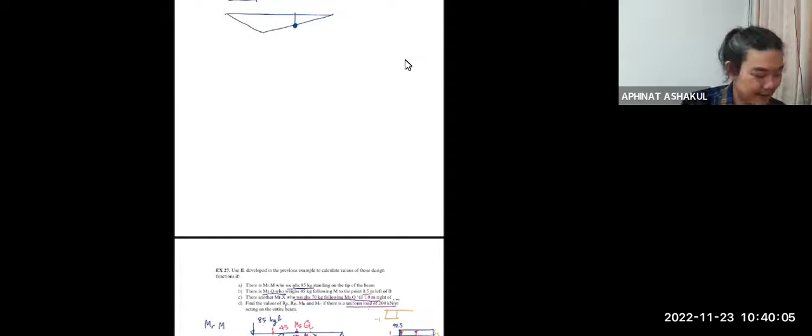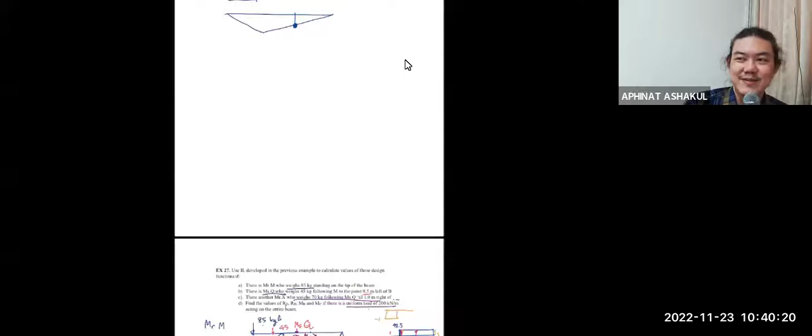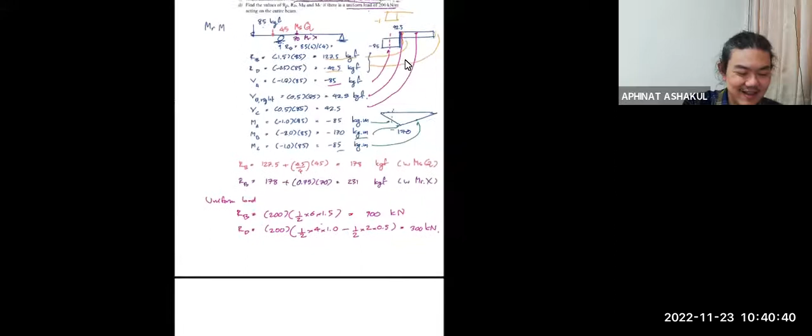You know what, I'm really glad about something like my accent, because I kind of mix the British accent with my pronunciation, just to make it a little bit more classy. I can also speak a few more accents if you want, just for the sake of not getting bored. But you would end up laughing, so that's why I don't do much of the accent change anymore.

Yesterday my daughter called me, and I picked up the phone and used a very strange voice talking to her: 'Hey, what are you? What do you want?' Like that. It just so happens her friends were nearby, and I don't know how they could all hear our conversation. She must have turned on the speaker. They laughed, 'Hey, your dad is cool.' I don't know how cool is that. Just change your voice. Anyway, okay, we're gonna try to do this.

So this is a new problem. Let's try to write it down. Okay, this is your beam, looks like this. And I give you a roller.

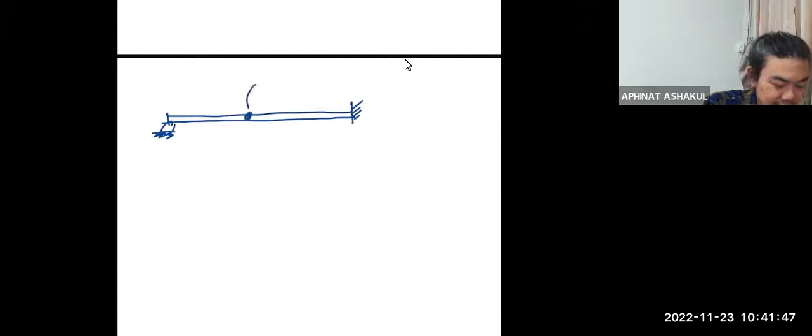This becomes the indeterminate structure, right? But I give you the internal hinge, so when you have the internal hinge, it means that generally this structure becomes a determinate one, correct? Because now you have an extra equation, knowing that this point has moment equal to zero.

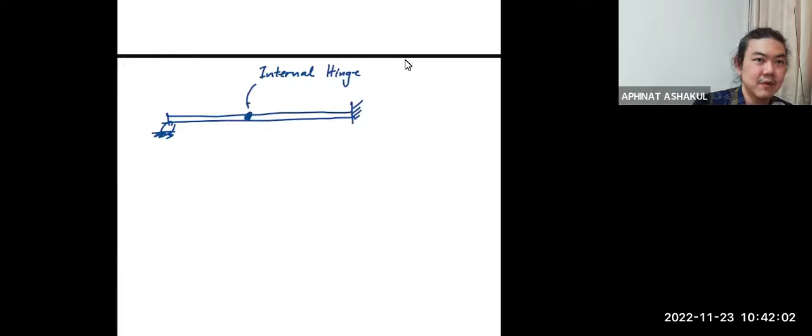And so I give the length 6 meters here, and we have a point of interest here at the distance 6 meters, calling that point C.

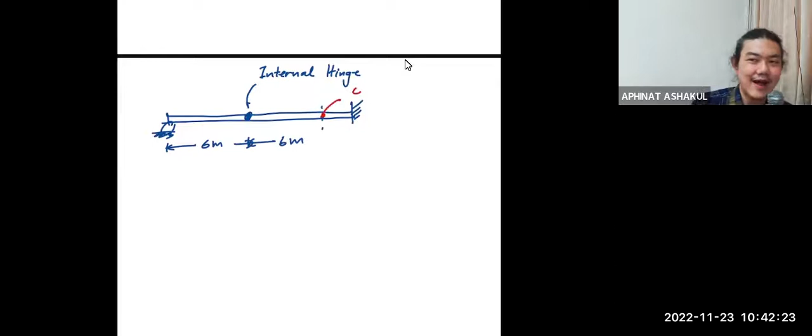So this accent, okay? Maybe still okay? Oh, but maybe we could try some accent, like Texas, like that. But I don't like that. Anyway, so let's go on, and this is 4 meters. Okay, it's a little bit too short, not drawn on scale, my apologies.

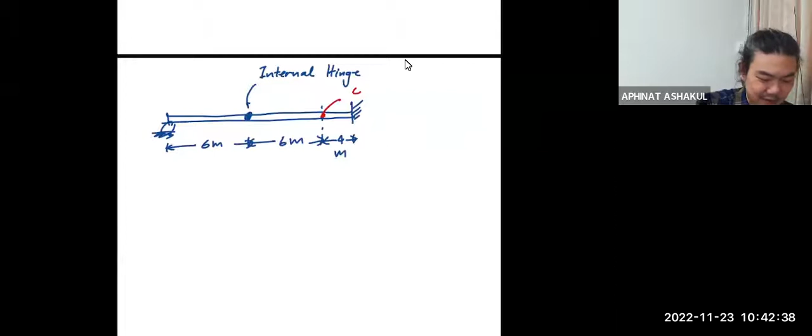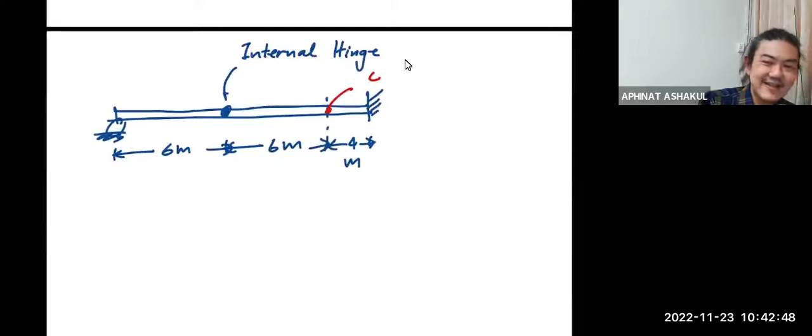Small, okay let's enlarge. And again, we call this point A, point B, and this should be D. We're going to try to draw the influence line for the following design functions. The first one is RA.

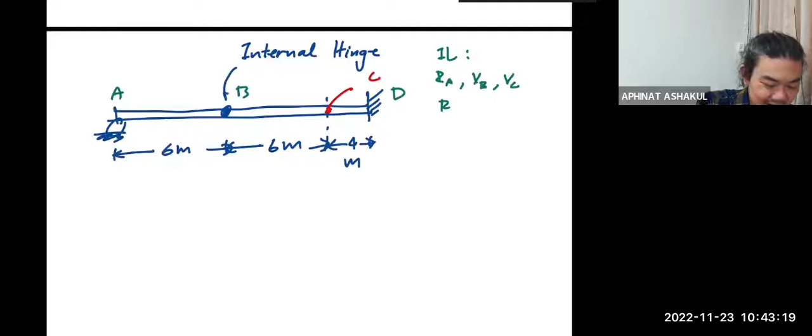Okay, right, small mistake, thank you. RA, the second one is VB, and then VC, RD, and MD. See what happens.

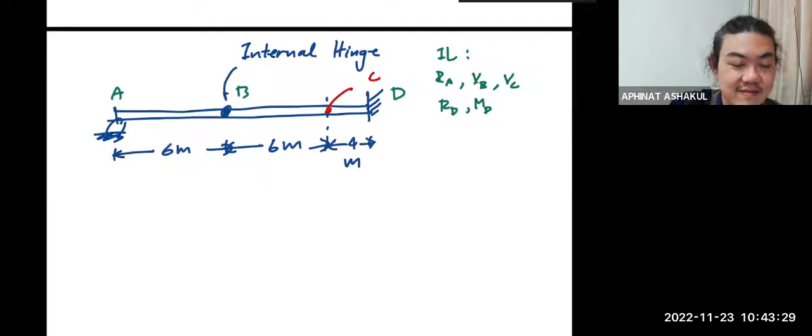You speak through the mask and I'm far away, I can't understand. No, it's not... are you trying to kill me with shock?

That is a very scary thing, let me tell you a story. Long time ago when I was doing my master's, there used to be a live session like this, and the professor was teaching to another campus. By the end of the session, the equipment guy said, 'Professor, I'm sorry, we could not do the live to another campus, so you have to do it again from the beginning.' Then he said, 'April Fool's.' You know what that is? April Fool's Day, you're supposed to tell a lie. The professor was shocked because he'd have to teach again for 3 hours. He said, 'Oh, good one.' So you were doing that on me.

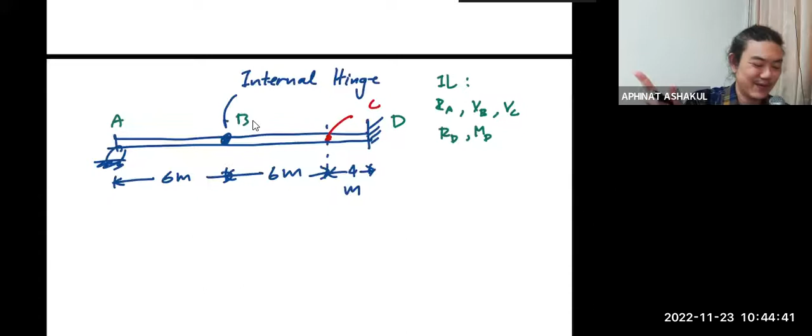Anyway, I'll give you guys a few minutes to finish this, okay? This would be interesting because now we have a little bit more complex structure. What always happens is you guys forget that you can apply the unit load anywhere to solve this. Let me go quickly, otherwise I'm afraid I may not be able to finish.

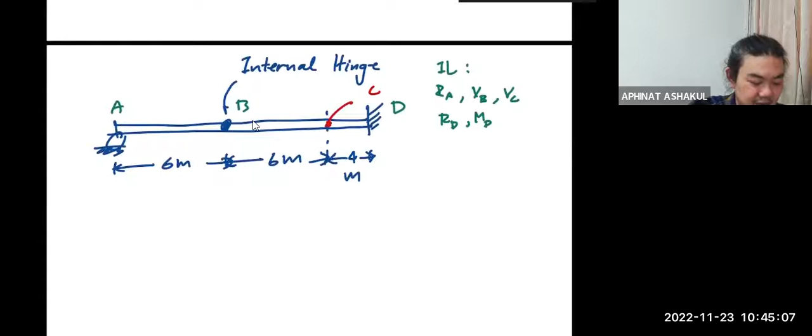So now for RA first, you know what's gonna happen. We let RA go free, right? But we have a hinge, so what do you think is gonna happen? RA will just go up, but this is a hinge, so it will go up like that. But when you try to push the portion BD up, that is a perfect cantilever beam. So when RA is free to move up, RA cannot move the BD portion, and therefore this becomes the influence line of RA.

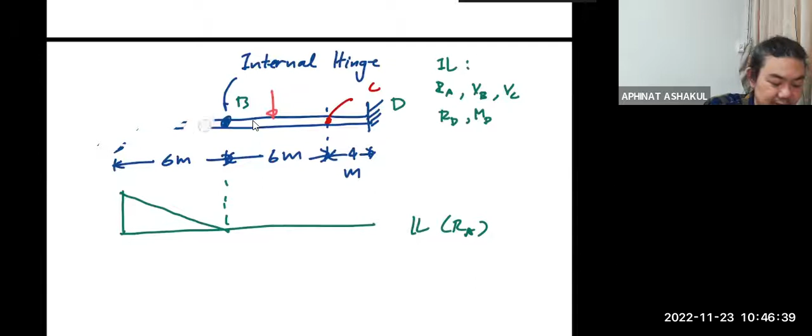When you look at the structure, you see that when your unit load reaches B and moves beyond point B, like this, when the load is between A and B, some reaction will be on A, right? But when the unit load moves beyond point B to between B and D, this is a cantilever beam, and you can forget about the fact that you have it. It becomes a typical cantilever beam, so it makes sense to have the influence line that looks like that.

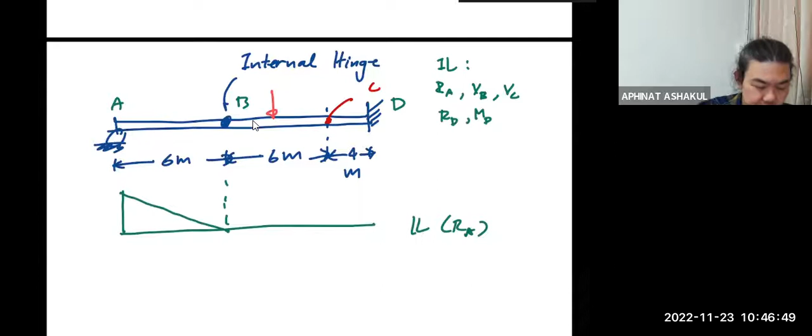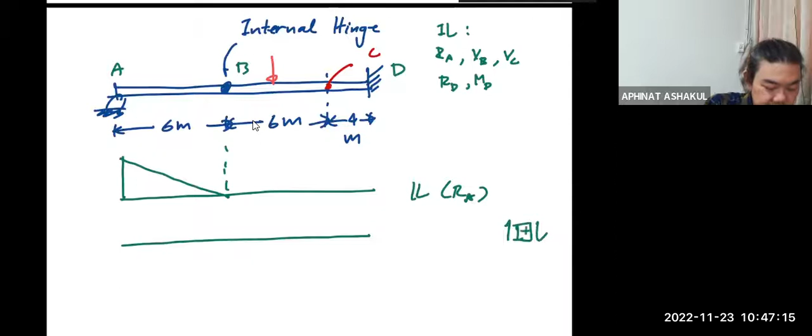Wow, you know, generally I would lock the door. If we have a typical on-site class, you're gonna have to wait for the next session to get in. Barging in late will destroy my concentration and your friends as well. But this is the last class, right? Can't do anything.

So this is the shear. When you think about how the load will affect your function, let's say okay, you guys are taking notes, I'm going too fast maybe. I decided to add the content, and now I'm a little bit afraid I may not finish the whole thing, so I'm going fast a little bit.

So okay, now guys are catching up, right? When the unit load is moving towards B, the shear at B should increase, because the section at B is under greater load when the load moves closer. In terms of shear, it should keep increasing until it passes point B. Again, there is nothing that is going to tear point B apart, so as soon as your unit load moves beyond this, the shear becomes zero.

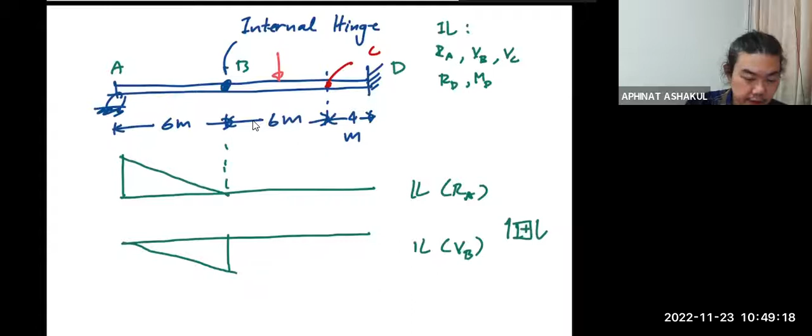It's my wish that you would see the behavior of the structure rather than trying to use the Muller-Breslau method and fail. Once you see how the method helps you, you should be able to relate what you have here with the actual behavior of the structure as well. Okay, and VC now. Oh, interesting.

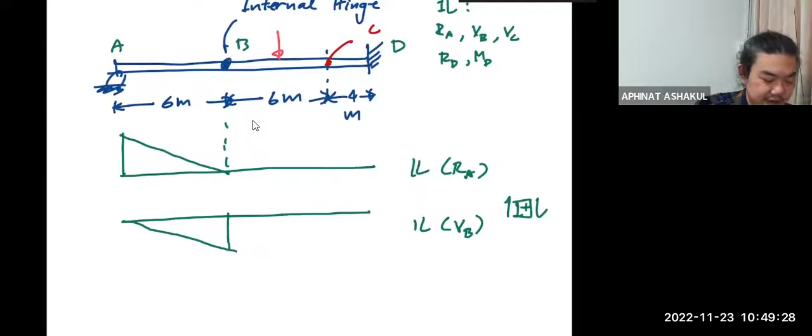Now VC is beyond here. So let me try to draw. So point C is now here, okay?

So when I want to free point C, on the right should go down, on the left should go up. So what's going to happen to the left side here? What's going to happen to this side? Remember, you have a hinge. So when it's going to go down, what does your imagination tell you? How is it going to move?

You have two hinges now at A and B, correct? So things should fall, like a typical hinge. Think about the door. So this guy should come down again. But here, you don't have anything anymore. It's just a solid structure with the freedom to move with the shear on the right. So this should look like this.

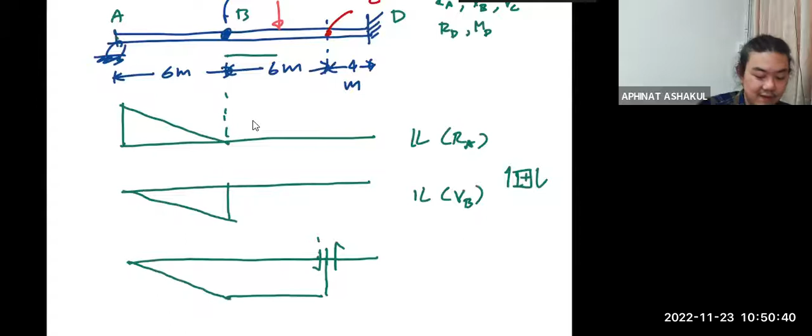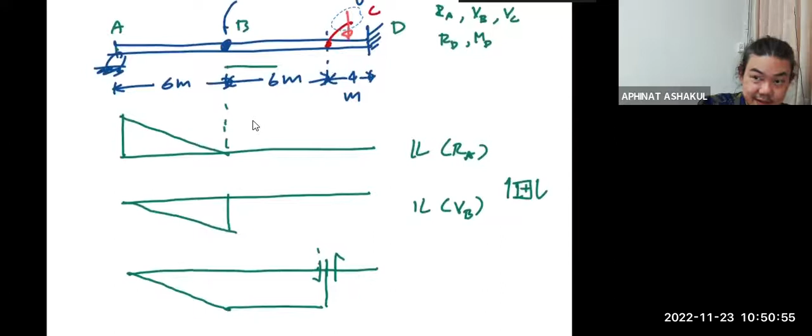Now, again, when the load reaches the right side, you have another cantilever. And there is nothing on the left side of your C, of your section C at all. So when the load passes point C, again, we should have zero shear. Because now you focus here and you see you have a perfect cantilever beam, when the load moves past point C. So the left side doesn't matter anymore. The shear becomes zero, and as a result, this becomes the influence line of the shear force at C.

And think about it. When you have this, you should always try. I think you guys are not looking very happy, so I'll slow down. It's time for you to use your imagination and talk to the structure a little bit more, right?

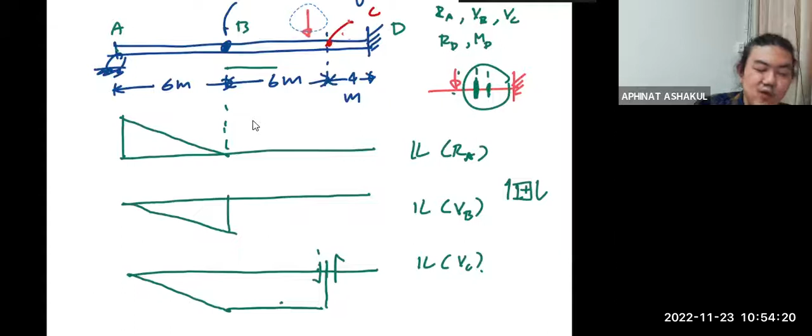Once this load passes point B, again, and moving towards point C itself, so you have a constant shear, right? Think about your shear force diagram of this structure. And again, once this load moves past point C itself, it becomes a cantilever beam. That's why we have a zero shear at C.

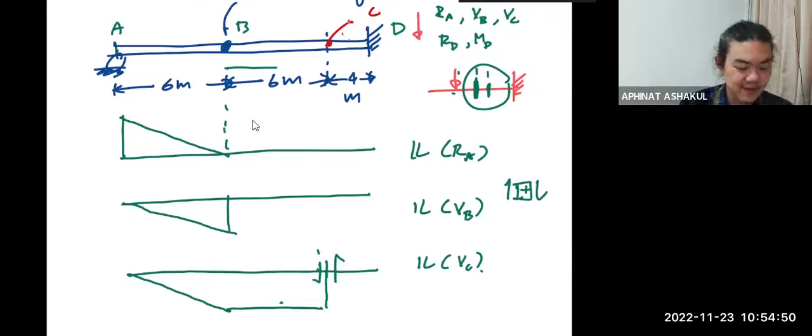It makes sense, right? This is how we use Muller-Breslau to the extreme, and you're going to have a lot more fun with the examples. But I think I have a few. Okay, and now RD, right? What's going to happen to RD?

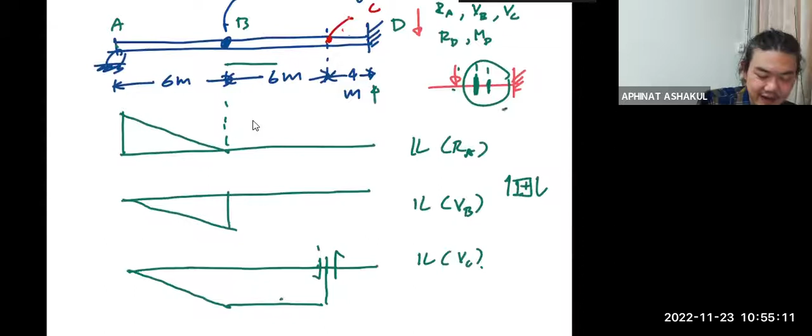When you want to move RD freely, RD is here, right? Think about it, because in a similar way to how I talked about the shear here. Once the load gets beyond point B, RD will become a constant, right? Can you see that? When the load moves past point B, your RD becomes a constant.

Because you now have a structure that looks like this, so your reaction is always equal to that. It doesn't hurt to go back and try to understand the structure rather than applying Muller-Breslau blindly.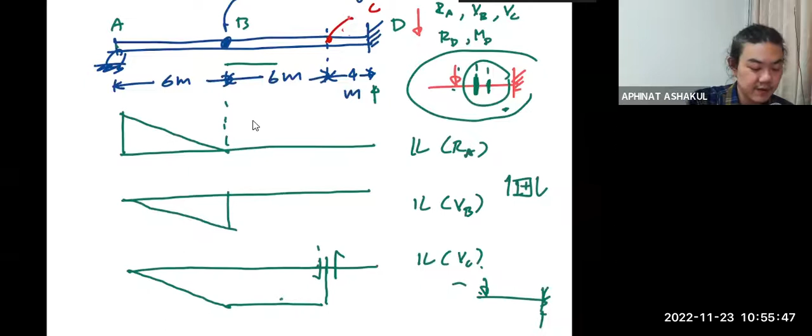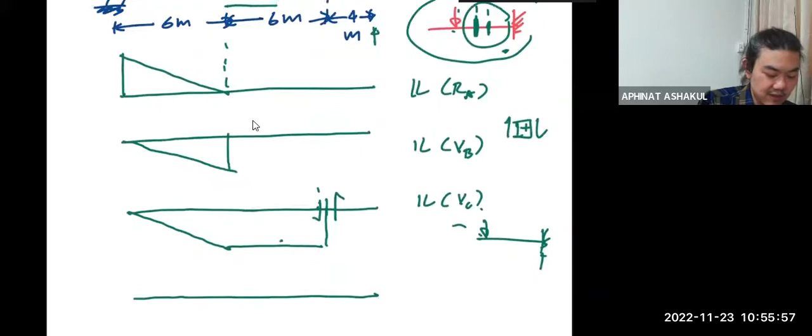So now, coupled with a little bit of knowledge, I can see that RA is going to be zero when your load sits on here, right? Likewise, when I try to move this, what happens is that because we have a hinge here, portion AB will move up, and then the rest will become constant.

So this is the influence line of RD. See? Because once the load moves past point B, you have a constant reaction, which is represented by this portion.

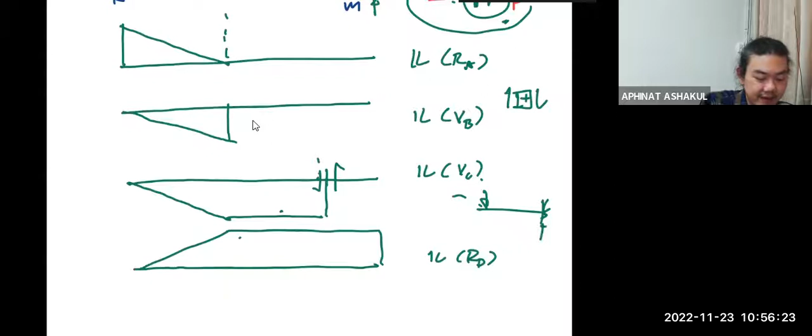In fairness to me, this is maybe one of the very first years I write a lot, because generally I don't write that much. I will speak, and it's your duty to take notes. But this year I decided to write more, so that those of you who don't have very good listening ability have a chance to see things. And now I have a complaint about my handwriting. Yeah, you win some, you lose some.

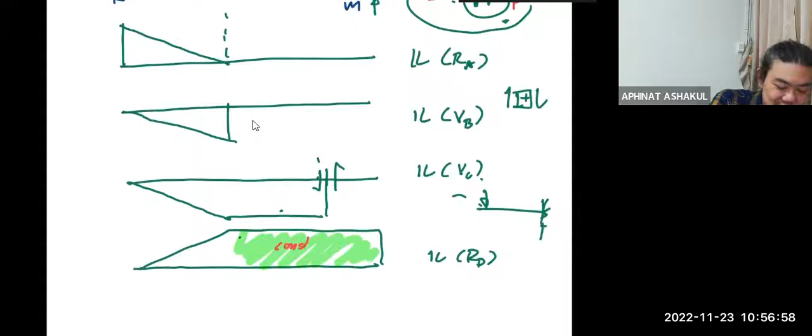So this is the region of constant RD, right? Not B. This is D. There's a dot, right?

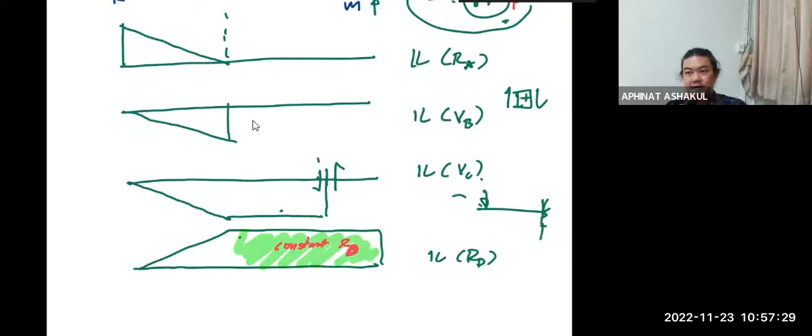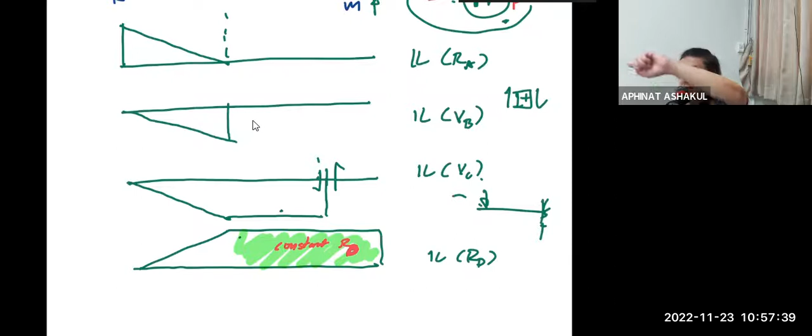And now, boom. Okay, please stop me anytime you have a question. Don't let it go by, okay? Just ask immediately before you forget. Hey, you guys need more light at the back, come and turn it on, okay?

Okay, what about moment now? The moment is going to happen when we let this guy go free like that, right?

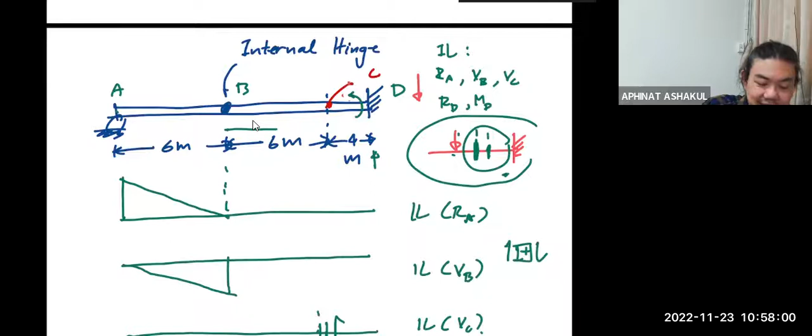Now we have a hinge at D so that this could move. We have a hinge at B, we have a hinge at A, so everything will fall, right? Because we have 3 hinges, so you can imagine that it will go like this.

Now, let's see if it makes sense. But you guys are writing first, right?

I thought about that day a lot when I got COVID, because the week before I went down with COVID, we got a lot more students in the room, more than this. That was the day with the most attendance. Everybody came in here, and then I got COVID. So I taught from home for a week, and the week after that I came, it was like the entire class disappeared. So sometimes, you know, this is on record, I can tell you the story about the collapse of the building.

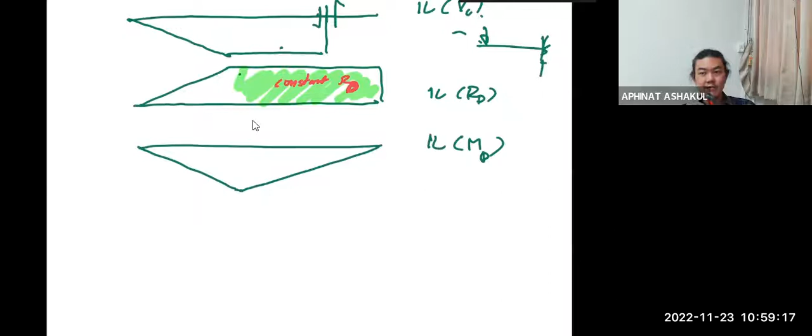My teacher, one of my very beloved teachers, said if you have something collapse, you need to have 3 bad things happen. First, bad design. Second, bad construction. Third, bad luck. So it takes a lot for one building to fall down. That hotel that Ajahn Bharat mentioned yesterday was in Korat province. It collapsed when I was a 4th year student, and I did not go.

The department organized a tour to the site. I didn't go because first of all, I can say I don't want to. Second, I had things to take care of because I was the vice president of the engineering exhibition. So my friends came back and said they smelled rotten water all over the place. More than 100 people died. You know what happened to the building? There was a cafe underground for lunch, and there was one troublesome column blocking the view of a singer. Audience couldn't see a beautiful singer, so they wanted it removed.

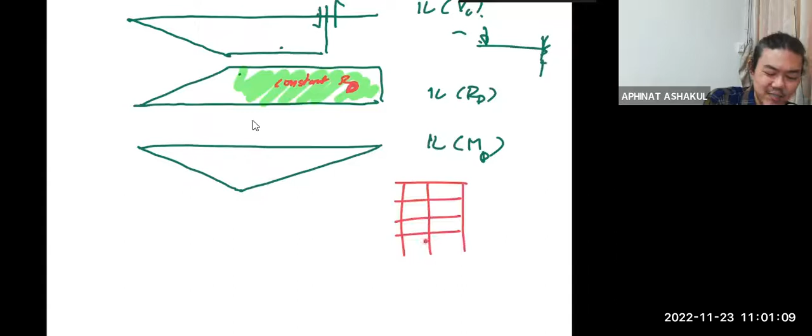Then when you remove the column, what generally happens? If you have a building like this, with columns coming down, and you have a lot of floors like this, say this guy is blocking a singer, so okay, we're going to remove it, right? Fine, no problem, you can do it. But you need to make this beam very strong, it's a transfer beam. It has to be able to transfer the load of this entire column across this distance.

The first thing was a bad design, because the guy who designed the connection between the beam and the column probably didn't do it properly. He wasn't a real engineer, he was like a foreman turned engineer. Second, I bet the construction didn't go very well either.

On the day the accident occurred, we generally store water on top of the building. Do you know why? Because of the head, so that water can flow down easily - you pump it up, then use gravity when you use it. On that particular day, the water tank was full.

Not only that, there was a small conference with hundreds of people in the conference room, so the live load was full. They said there was a sign that these columns were about to collapse, because cracking occurred before, but nobody paid attention. When the collapse occurred, the concrete just burst out of the column - in a concrete column you have reinforcement like this, right? No concrete was left in the stirrup area at all. It was complete failure of the concrete.

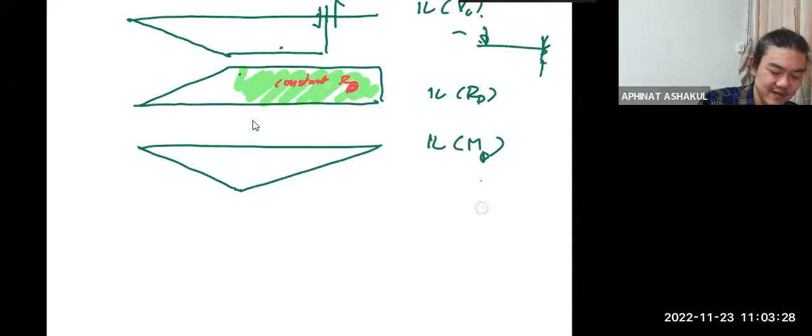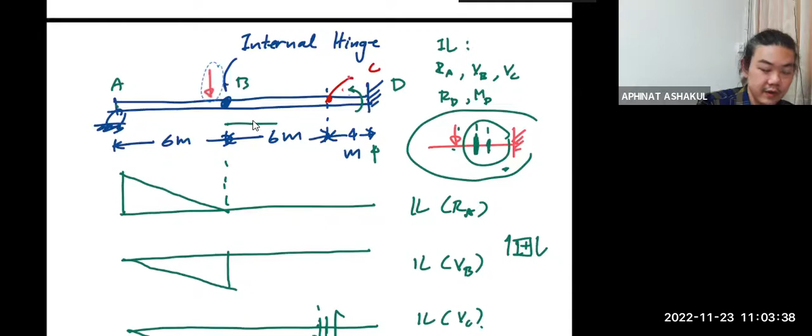Okay, so here think about the moment - let's go back to the load again. If you look at the shear, when the load is here and moves toward B, the shear at B keeps increasing, and the shear at B applies to the portion BD. So as the magnitude of the load keeps increasing, the moment at D should keep increasing, and it will be maximum when the load itself reaches B.

From this point onward, the shear on BD will remain constant because the load is now on BD. However, this time the moment will keep reducing because the moment arm keeps reducing as the load moves towards the support itself, until it reaches the support and the moment arm becomes zero.

So that is why we have the bending moment diagram - the influence line of the moment at D. It increases at first until the load reaches B, then it reduces because now your load becomes constant, but it moves toward the support, so the moment arm keeps reducing. So it makes sense, and now the next question is: how much?

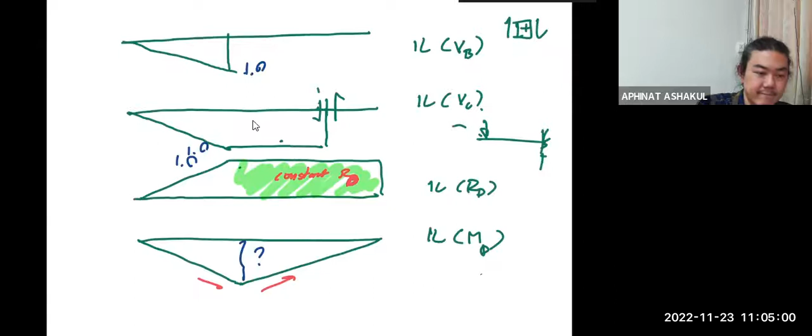This is one, right? No need to discuss one. This time you use too much of your intelligence to understand this. It's a good thing because you're seeing this for the first time, so it can tire you out because you think a lot - it's only natural.

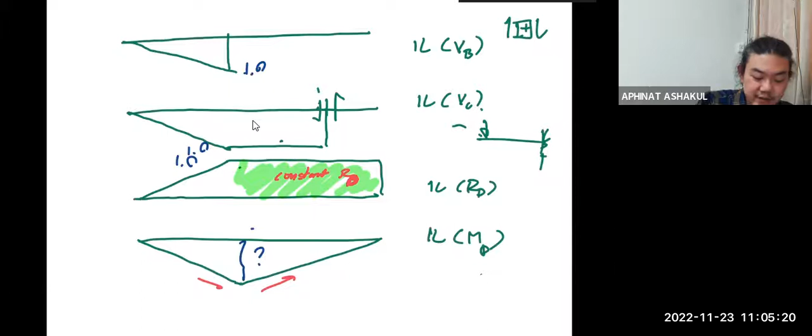Now this value comes from the fact that you load the unit load at B, right? Because this is where the maximum moment occurs. And what's this distance? I think it's 10, right? So what's the moment? Oh, it's 10 - so this is 10, not 1, okay?

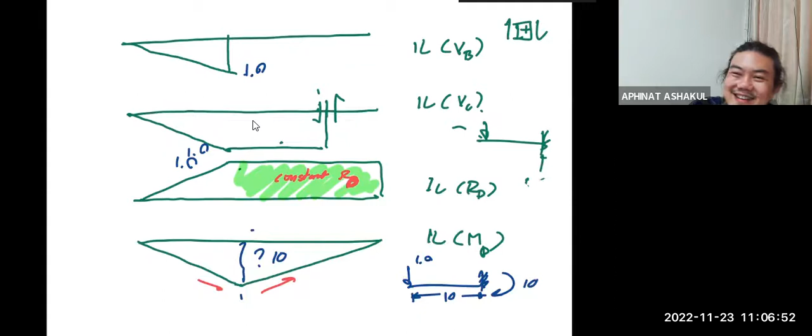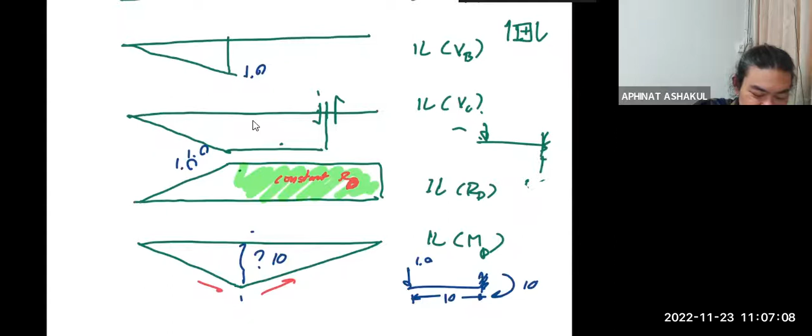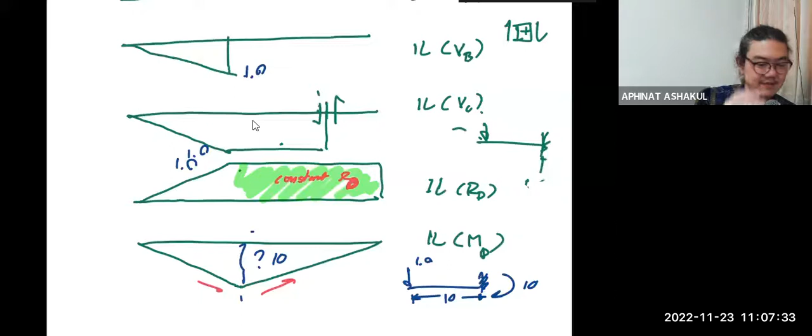Do you have any questions on this? No? So hopefully it's crystal clear. Is it? Oh yeah, right. I shouldn't expect anything less, right? You guys are the most brilliant in the world, so I think it should be crystal clear to you. Okay, I put my glasses on for no reason, like a prop.

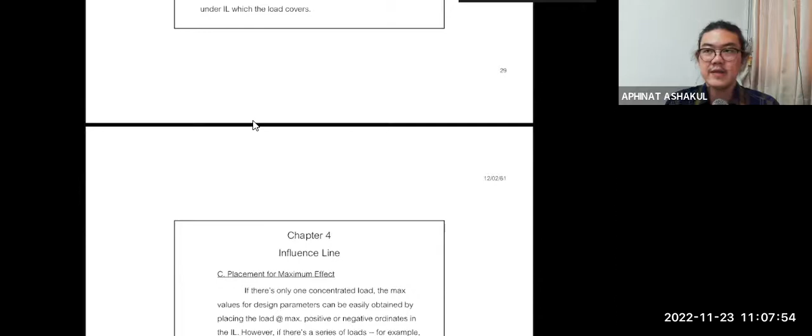Because I need to go back here a little bit to demonstrate the use of the influence line. Remember last time we talked about the fact that you can multiply the influence line with the magnitude of the point load, or multiply the magnitude of the uniform load with the area of the influence line that we cover. That's the first function - seems like a bit British today, right?

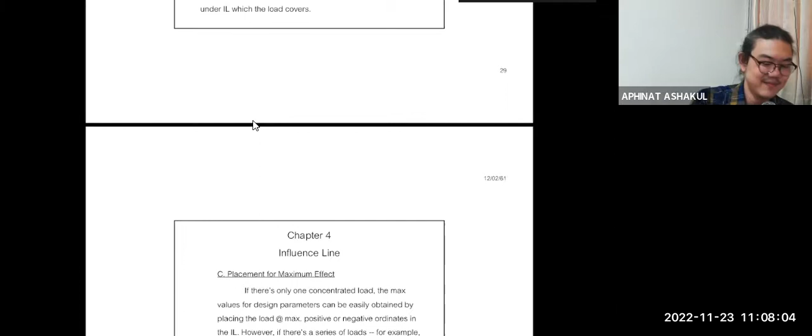Anyway, now we are going to focus on another thing called the placement for maximum effect. This is actually the real use of the influence line. First of all, we need to be able to figure out the fact that when the load moves around, what is going to be the most critical position that gives us the most critical value of the design function.

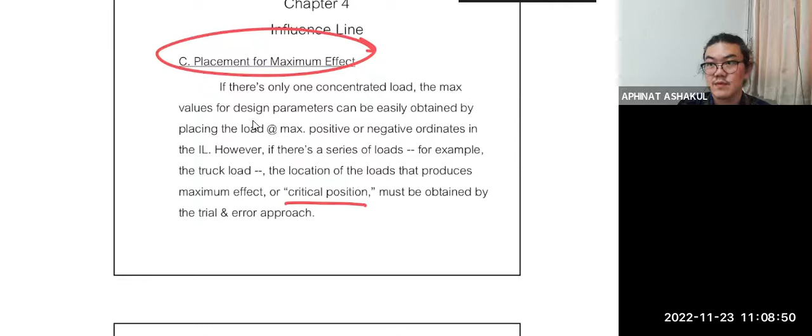Now we're going to start by looking at the first thing. Generally, let's say if I want to know - we have moving loads coming in, a lot of them moving towards the beam like that.

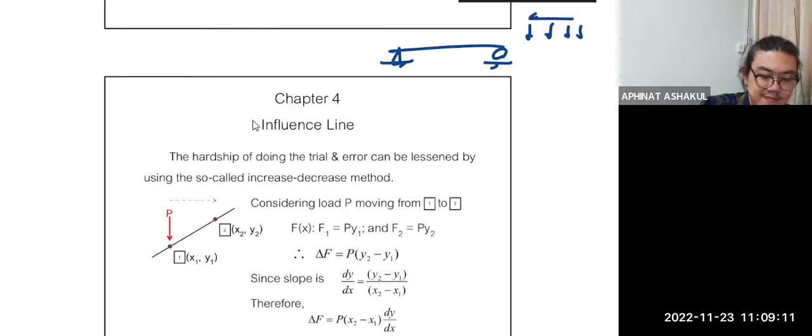When the load moves toward the beam, I want to know the shear at C. What kind of loading position will give the largest magnitude of shear at C?

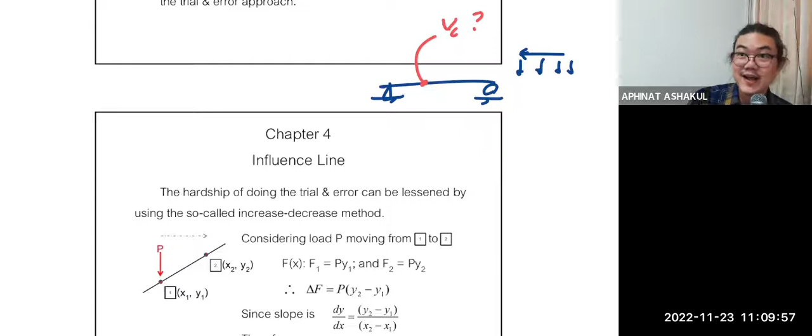If you don't know anything, you'd say we're just going to have to keep trying every position, right? Let's say we have 200 loads. We'd put load number 1 on C, load number 2 on C, 3, 4, 5, until we reach 200. But that would be the Stone Age, right? Even though we have computers now, we still have a better method.

So the first one we call the increase decrease method.

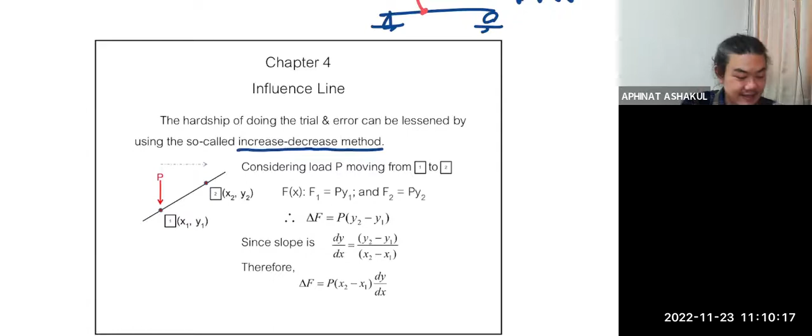Let's say now, I'd love to see the load moving from right to left, but now it's moving from left to right. Let's say I have a load P here. You can see it moves to the right, goes up the slope of the influence line. At position 1 we have coordinate x1, y1, and at point 2 we have x2, y2. The x would be the distance or location on your beam, and the y would be the height of your influence line.

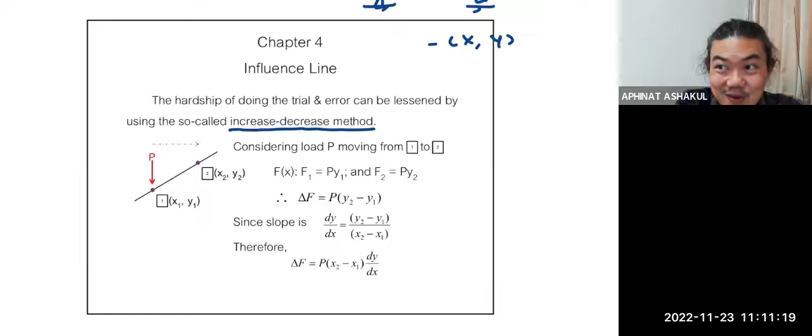When we talk about the coordinate system xy, do you know its name? Do you know the official name of the coordinate system xy? Want to try your luck? Look at your friend. Do you know what it's called, the XY coordinate system?

It is called Cartesian system. Right? It tends to go like that, my hand, right? So it's because I'm talking and writing at the same time, and I write what I talk, so I don't want you to feel like, oh, Cartesian, it goes like that. And when you don't catch up, you don't ask me what is this, I'd say, how the hell would I know, because I was talking and writing at the same time. You need to ask, you know?

Okay, anyway, it's called Cartesian system. And there are 2 spots, so we call it coordinate. If we talk about 1, it becomes ordinate. So right here, if we talk about the height of the influence line, we can call it ordinate.

Now, from the use of the influence line last time, we say the design function equals the load itself multiplied by the height of the influence line. That will give you the value of the design function: the load multiplied by the ordinate. At point 1, you have P multiplied by Y1. At point 2, you have P multiplied by Y2. Remember, load P moves from point 1 to point 2.

So now I can say delta F, the difference of the design function when the load moves from point 1 to point 2, is going to be equal to the load multiplied by the difference of the height. This is the difference of height. You can call that delta, you can call that dy, you can call that gradient. But it's just y2 minus y1, the height here.

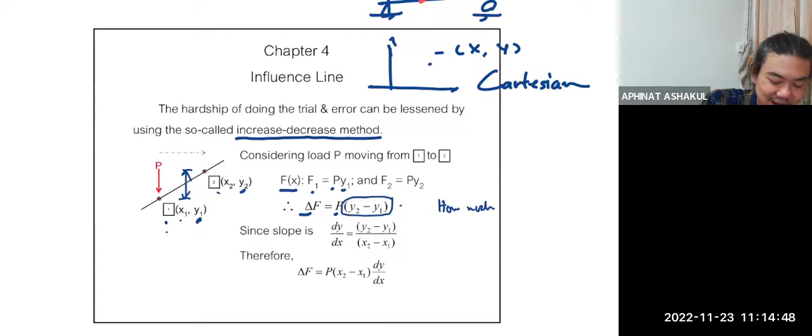I never did this before, until this year. Last year, this year I have done a lot more. So how much the design function changes, not the design function itself, how much it changes. That's why it is called delta, the difference, not the force itself.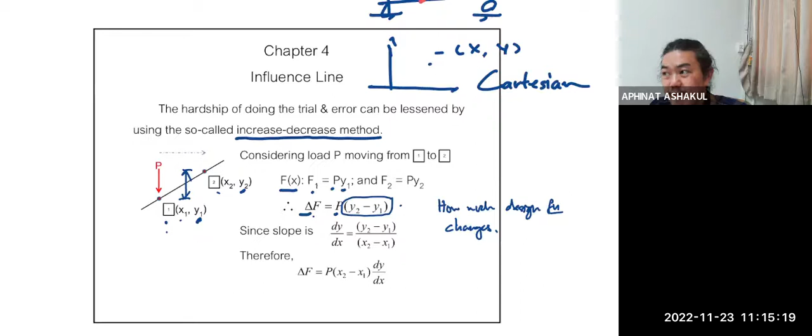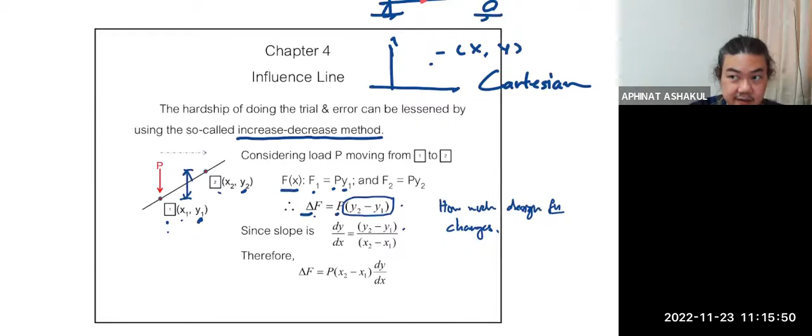We all know dy by dx by heart, right? Love it, hate it, you know why. Dy by dx is simply the slope, correct? So we're talking about the change of the slope in the y direction, the change in distance in y direction versus x direction. We call it the slope. Dy by dx would therefore become y2 minus y1 over x2 minus x1.

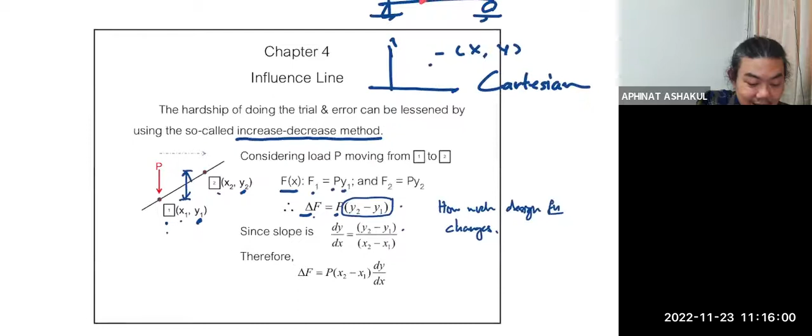And I now can replace this, y2, y1 here by this equation. I can move x2 minus x1 on this side and replace it here. So this equation becomes the force multiplied by x2 minus x1 multiplied by the slope.

X2 minus x1 would represent what? The distance that the load moves. We are interested in point 1 and point 2. We should be able to obtain the distance that the load moves very, very easily. So this one is easy to find. It's just the distance the load moves, right?

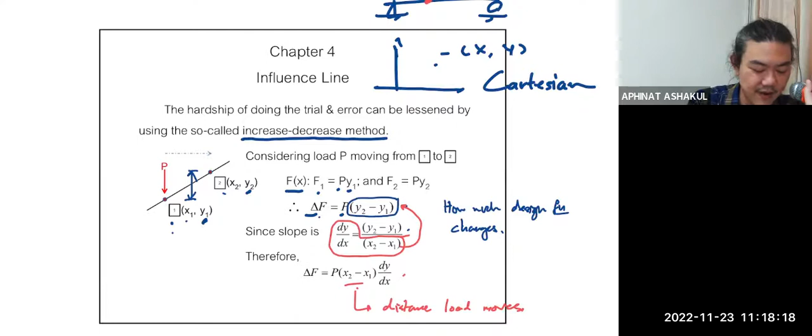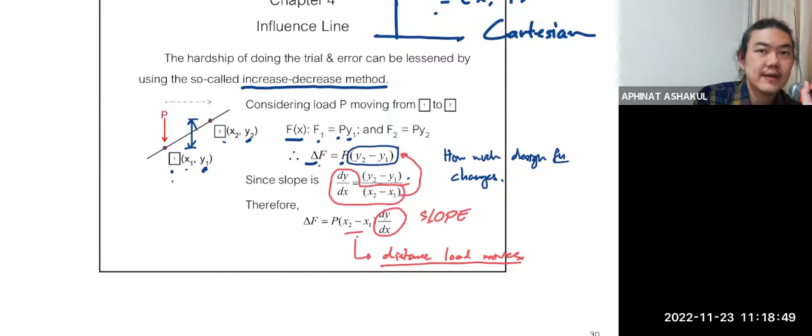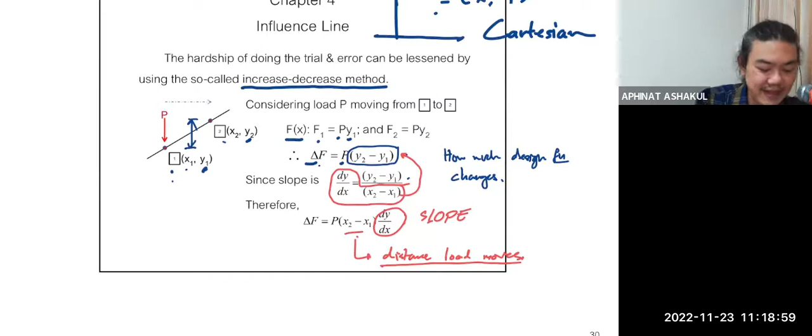Another fact, anyway, so here is the distance that the load moves, which is easier, a lot easier to obtain. And here becomes the slope of your influence line, which again, very easy to obtain. That's the main reason, because if you use this equation, it means you have to calculate the height of your influence line every single time. But here you have the influence line, you know the slope, and the distance just comes naturally. That's why we changed it.

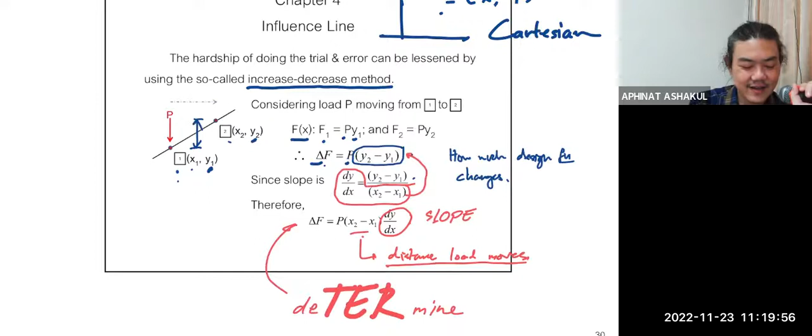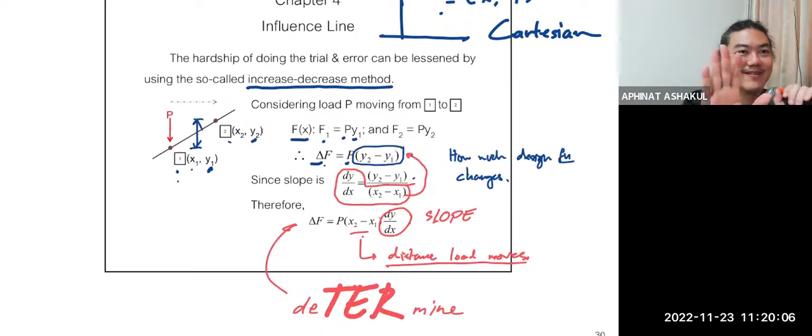And therefore, in the end, we have now the formula that can help you determine, whatever, it's determine. I can write down D and then determine. Pronounce it like that, and they will understand, not me. Determine. Sorry, I have to be dramatic, otherwise I just cannot get into my groove. I don't know why I have to be crazy like this, but I just couldn't help myself. So this should help you determine the change of the design function, not the design function itself. All right, can tone down the energy.

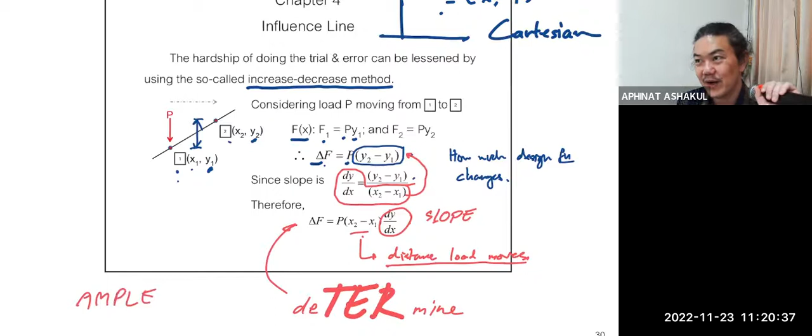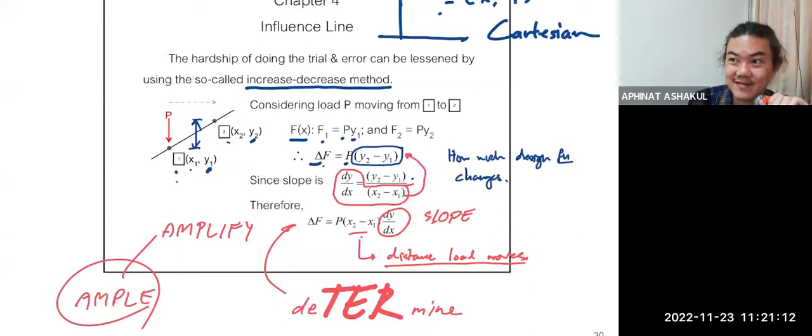The amplifier is there. Ample, you know what ample means? Ample. You know the amplifier, right? Yeah, but you don't know the word ample. Ample is an adjective, it's a lot. So to make it a lot, you change it to a verb, so it becomes amplified. And the thing that amplifies becomes amplifier. So the thing that only amplifies without control, we call that pre-amplifier. The amplifier that you can control the volume, we call that integrated amplifier. So we're talking about the stereo now. Sorry, it's going off topic again.

All right, so here we go. That means if you want to determine the change of the design function, you have the load already. You need the distance that the load moves and the slope. That's the first method, and that is the break. Any questions? It's best if you see the example, but this is the concept.